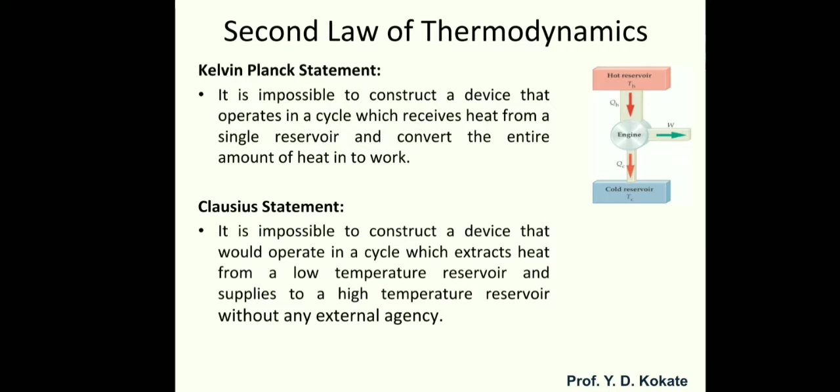Similarly, for the Clausius statement, let's understand with this diagram. It is impossible to construct a device that would operate in a cycle. Here is a hot reservoir, here is a cold reservoir. Naturally, you can imagine a very high temperature reservoir and adjacent to it a low temperature reservoir. It is natural, it is spontaneous, that heat is transferred from high temperature to low temperature. For that purpose there is no need of any kind of device.

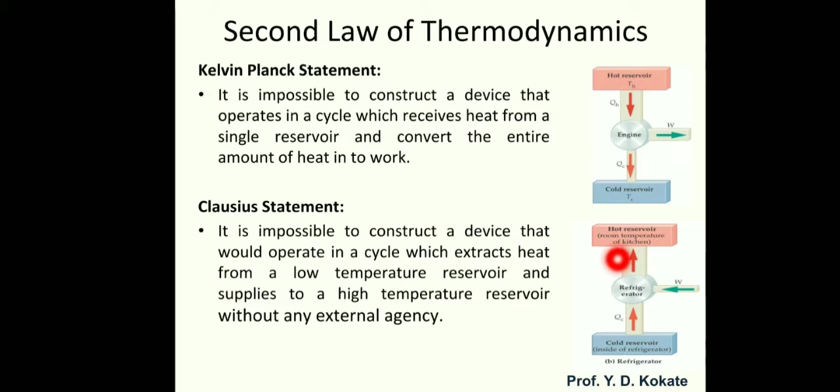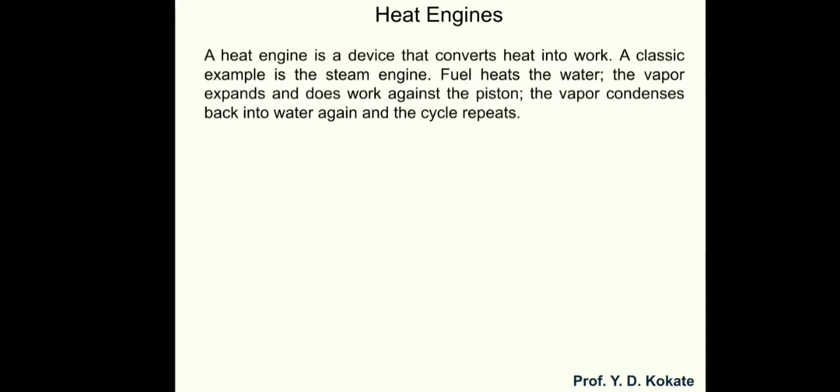We already looked at the heat engine, but in the context of the second law, once again we repeat it. What is a heat engine? An engine is a device that converts heat into work. A classical example is the steam engine, where we provide heat energy so as to convert the water into steam.

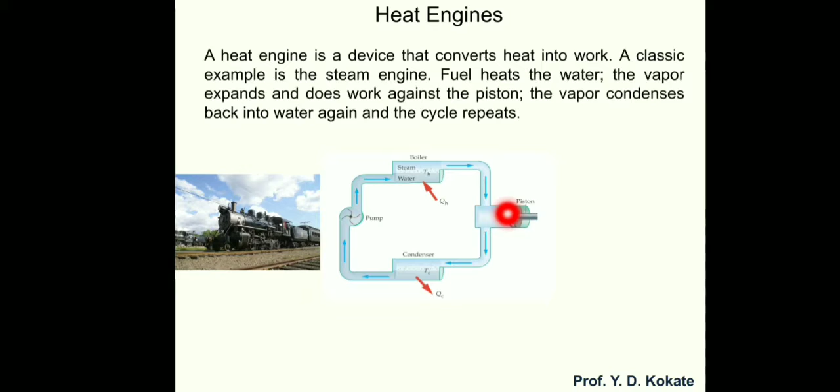So you can see over here, this is the hot reservoir, and inside this hot reservoir we supply the heat to the water so that water is getting converted into steam. This steam is coming inside this piston cylinder arrangement, and due to that the piston expands. This is nothing but the mechanical work done. So you can see over here, this hot reservoir is nothing but this boiler. This is the engine where we get the work done, and once this

steam has given its energy, that steam potential is getting down, it is getting degraded. That low potential steam comes inside the condenser, and inside the condenser the heat is getting rejected. This is getting rejected in the cold reservoir. So this is the boiler, that is the hot reservoir. This is the condenser, that is the cold reservoir.

And again this steam, once it rejects its heat, it comes into the water once again, and that water is again fed to the steam boiler, so that this cycle is getting repeated. So this cycle is nothing but the heat engine. So you can see the working of your heat engine over here.

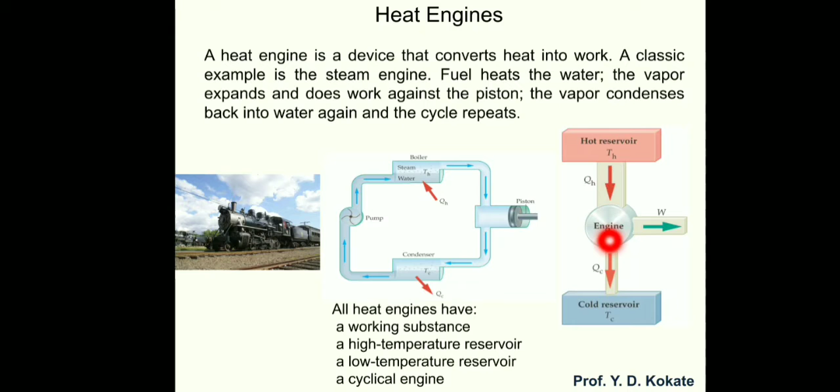So the main objective of a heat engine is to produce work done with the help of heat energy input. The efficiency of the heat engine we already calculated. The main outcome is the work done, and to get this work done we have to provide the heat energy. So QH is an input and W is the work done. So how can we calculate the work done? QH, that is 20 watt, let's say, and 15 watt is the work done produced. So 5 watt of energy is getting rejected. If I want to calculate W, I can easily calculate it, that is 20 minus 5, which is 15. So QH minus QC will be the work done.

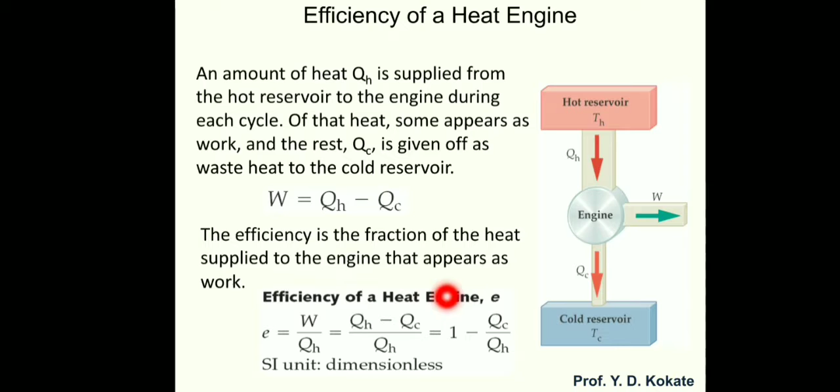If I want to calculate the efficiency, it is very simple. Work done, that is output, divided by input, that is the heat energy supplied, that is QH. W, that is work done, I can also write as QH minus QC upon QH, which is equal to 1 minus QC upon QH. So the maximum efficiency a heat engine can reach is when QC upon QH, we can also write as TC upon TH. That efficiency we also call the Carnot efficiency, that is 1 minus QC upon QH. We can replace QC upon QH with TC upon TH, so it is 1 minus TC upon TH.

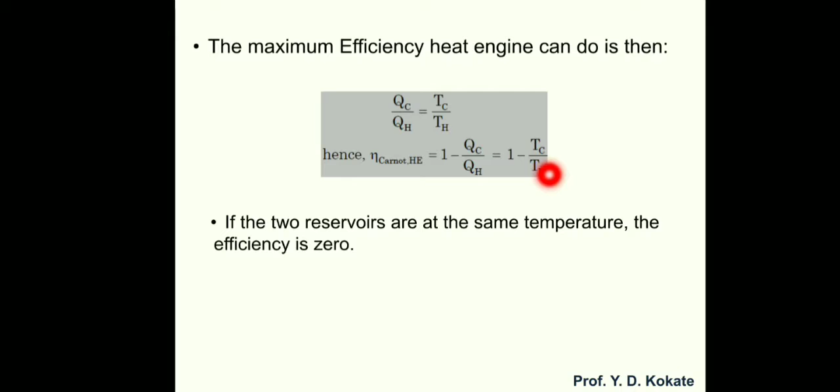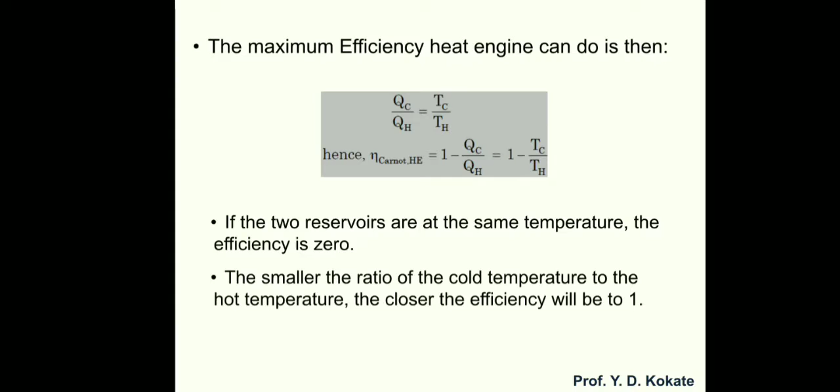So if the two reservoirs are at the same temperature, the efficiency is 0, because TC and TH will have the same temperature, so they will cancel. So 1 minus 1 will become 0. The smaller the ratio of cold temperature to hot temperature, the closer the efficiency gets to 1. That means when the temperature difference between the hot reservoir and cold reservoir is large, the efficiency is closer to 1.

Now the next device is the refrigerator. In a heat engine, we supply the heat and we get work done, and we reject some amount of energy. So here the objective is to produce the work done. Then that device is known as a heat engine.

But in case of a refrigerator, the objective is not to produce the work done. So you can see that here the arrowhead is not going outside the diagram, it is coming inside the refrigerator. That means here we have to supply the work. So that's why we call the refrigerator a power absorbing device. But in case of a heat engine, we call it power producing. Here power is getting produced, because the objective of a heat engine is to produce the power.

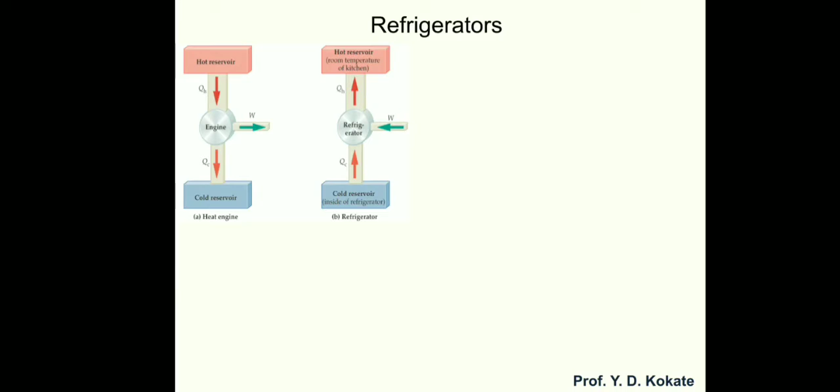But in case of a refrigerator, by using the work done, we can transfer the heat from low temperature to high temperature. So the objective in case of a refrigerator is to transfer the heat from the low temperature reservoir to the high temperature reservoir. So you can see in the refrigerator we continuously absorb the heat from inside the cabin and reject it into the outer atmosphere, which has a higher temperature than the inner side. So you can see the refrigerator over here.

So what is QH? Simple, if I am providing 3 watt of energy, I can absorb 2 watt of energy from the cold reservoir. So 3 plus 2 is the total energy that I have to reject. So QH will be QC plus W. So in case of a refrigerator, we are not finding the efficiency, we are finding the COP, called the coefficient of performance.

Why coefficient of performance? Because here the desired effect is different. Here the desired effect is not the work done. Here the desired effect is nothing but how much heat energy you absorb. So here I am interested in QC. I am not interested in QH or work done. How much heat I can absorb from the cold reservoir is important.

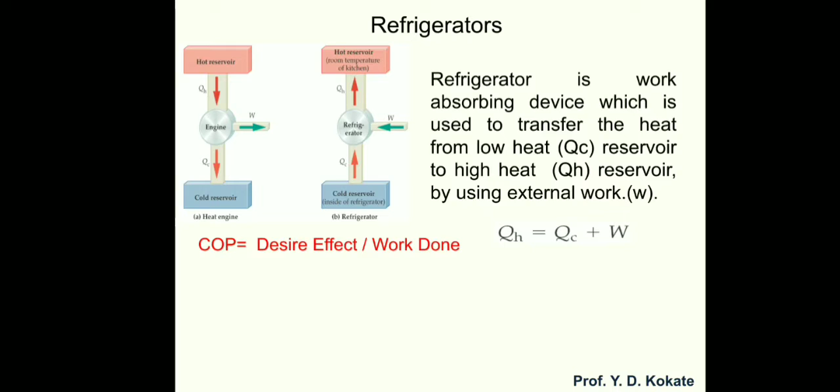So you can take an example of a refrigerator. In the refrigerator, we are interested in how much heat energy is absorbed from the cabin so that the cabin temperature decreases. We are not interested in how much energy we reject. Okay, so COP, the coefficient of performance, is equal to the desired effect upon work done. So why is the work done in the denominator?

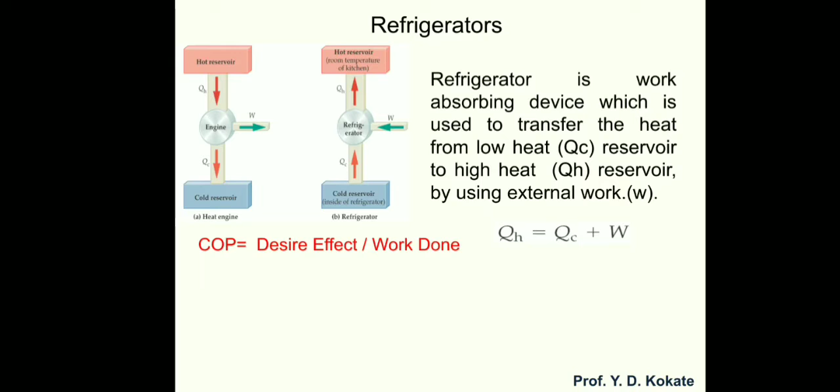Because whatever desired effect we want, for that purpose we have to provide the work done. So work done will be your input. So COP is nothing but the desired effect divided by work done. So how to calculate the

COP of a Carnot refrigerator? So what is your desired effect? What is your objective? To absorb the heat, that is QC. So QC in the numerator, and for that purpose you provide the work done, that is W cycle. So how do we write the work done? That is nothing but QH minus QC. So we write QC upon QH minus QC. And as we know that we can replace the heat by temperature, the same formula will be formed, that is TC upon TH minus TC.

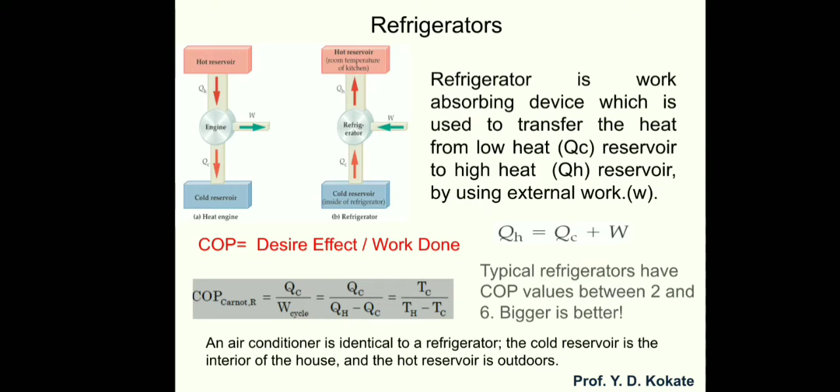A typical refrigerator has a COP value in the range of 2 to 6. We always prefer a bigger value of COP. If the value of COP is more, that means we get more performance from the refrigerator. So when we go into the market to purchase a refrigerator or air conditioner, we should always prefer a device which has a higher COP. Always remember.

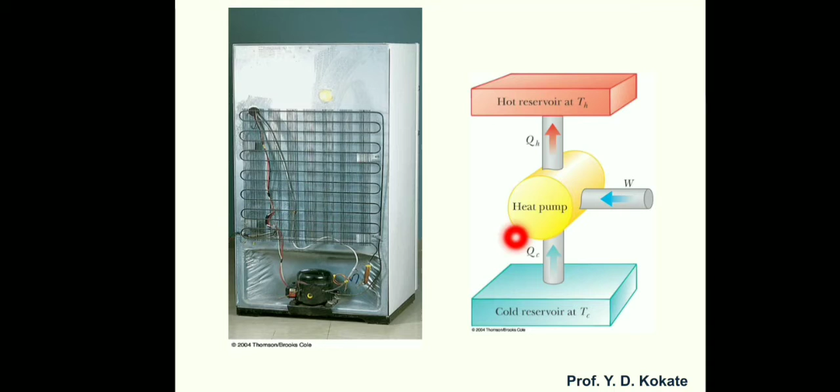Here the refrigerator compressor becomes your device which takes the heat. Here it will be called a heat pump. You can imagine that over here is nothing but the refrigerator, because the same diagram is applicable for the heat pump, just the difference of desired effect that we will discuss in the next slide. Okay, so here I want to write refrigerator instead of heat pump. So in case of refrigerator, our desired effect is QC, and that we get with the help of work done.

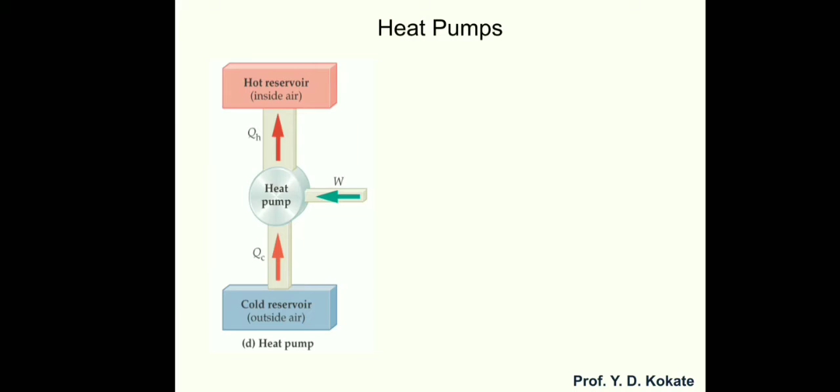So what is a heat pump? As in the previous slide we already saw the refrigerator, the same diagram you can see over here. QC amount of heat we absorb and QH amount of heat we reject to the hot reservoir with the help of W, that is W amount of work done. So what is the difference between heat pumps and refrigerators? So for heat pumps, our desired effect is different. We are interested in QH, that means how much heat is rejected.

Now the question is what sort of devices, or in which case, we use the heat pump. So if I give an example, let's say we take Shimla or Kullu Manali, where the temperature is very low. So at that time we want a warm effect inside the room. So we want to absorb the heat from the outside climate, though it is very low temperature, and reject it into the room, so that the room temperature increases. So we are interested in rejecting the heat, and that device we call a heat pump.

So a heat pump is the device which can absorb heat from a low temperature system and reject it into the high temperature reservoir. Okay, so you can see in this diagram, heat is removed, that is QC, from the cold reservoir, that is outside, and exhausted into the house, keeping the house warm, that is at QH temperature. So you can imagine that this is our room, and inside this room you want to increase the temperature. Before that, this is the outside atmosphere, let's say it is at -5, and this inside room is also at -5.

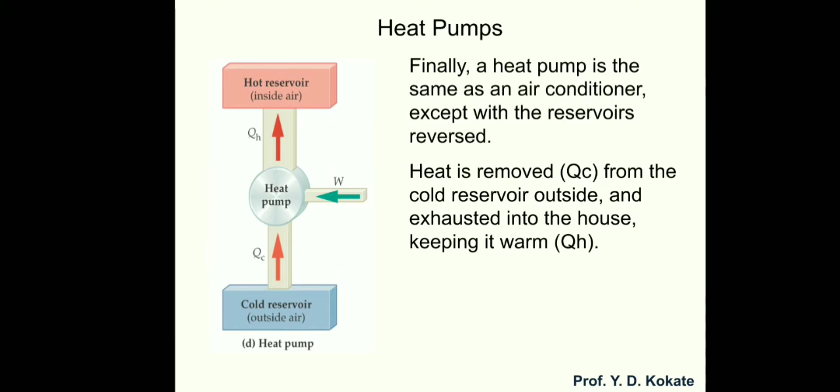But as you heat with the heat pump, the outside heat is absorbed by the heat pump and rejected inside the room, and due to that, as the heat content inside the room increases, the temperature inside the room will increase. So we get a warmer effect inside the room. So at that time our desired effect is changed. So you can see that the work done will be the same, that is QH minus QC.

If I take QH outside, it becomes QH times (1 minus QC upon QH), that is QH times (1 minus TC upon TH) in terms of temperature. Now if I want to write down the COP, in case of a refrigerator, COP is nothing but desired effect upon work done. So desired effect is the amount of heat absorbed, that is QC, divided by work done in case of a refrigerator. But in case of a heat pump, our desired effect is the amount of heat rejected, that is QH. So it becomes QH upon W.

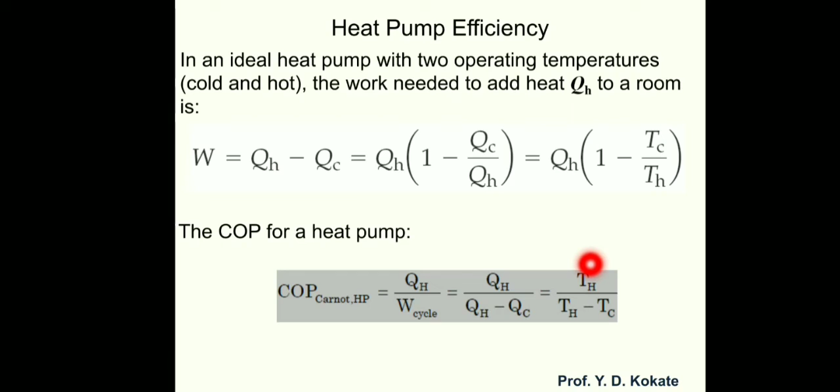How do we write W in terms of heat rejected? It becomes QH upon QH minus QC. In terms of temperature, we can write TH upon TH minus TC. So if we write down the different performance measures, we look at three types of devices. The first one is an engine, which is a power producing device. For that we calculate the efficiency, that is W upon QH, because W is the output and QH is the heat input. We can also write it like this.

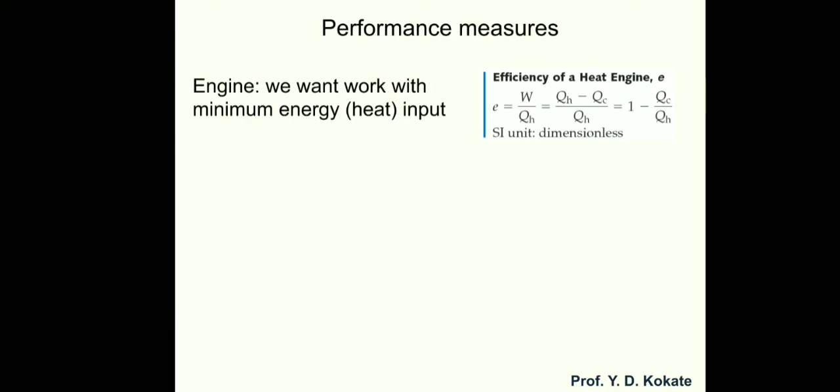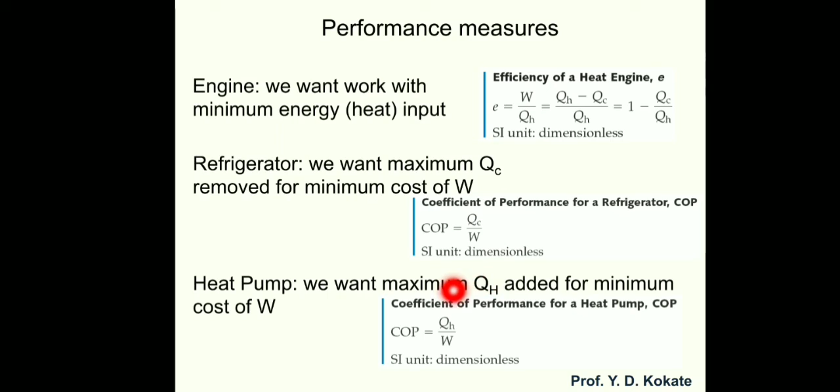Taking the next device, the refrigerator, here our objective or desired effect is the amount of heat energy absorbed. So your COP becomes QC upon W. In case of a heat pump, our aim is to reject heat, more and more, so as to increase the heat content. So the numerator becomes QH upon W. So COP is always desired effect upon work done, but the desired effect in case of a refrigerator is the amount of heat absorbed, while in case of a heat pump it is the amount of heat rejected, and that's why the formula changes.

So with the help of COPs, if I write down the COP of refrigerator and COP of heat pump, you can see that the denominators are the same, but the numerators are different. If I write it simultaneously, QL upon W net, then I get COP of heat pump equal to COP of refrigerator plus 1. This is a very important equation, and many times in competitive examinations they may ask: for the same temperature, if the COP of heat pump is 4, what is the COP of refrigerator? It is always less by 1, that is 3.

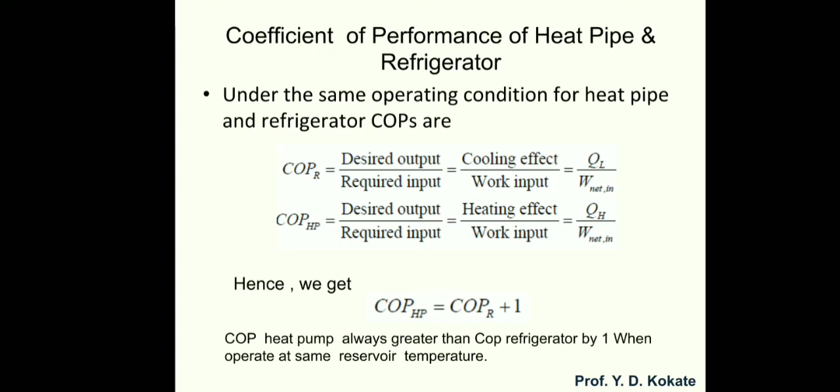They may ask like this: the COP of refrigerator is 4, and at the same temperature, if we convert that refrigerator into a heat pump, what COP do we get from the heat pump? Simple answer: if the COP of refrigerator is 4, the COP of heat pump is greater by 1, so it is 4 plus 1, that is 5. Like that you can calculate. So COP of heat pump is always greater than COP of refrigerator by 1 when operating at the same reservoir temperatures. This is very important. Okay, so this is one numerical treatment.

In this numerical, an industrial heat pump operates between the temperatures 27 and minus 13 degrees Celsius. So 27 is the higher temperature, so we add 273 plus 27, and it becomes 300 Kelvin. And the lower temperature is 13, so 273 minus 13 becomes 260 Kelvin. Here is the minus sign. The rates of heat addition and heat rejection are 750 and 1000 watt respectively. The COP of the heat pump is?

So very simple. We know the COP of heat pump is the amount of heat rejected divided by the amount of heat rejected minus the amount of heat absorbed. So what is the amount of heat rejected? That is 1000 watt, divided by 1000 minus 750, that is 4. So option C is correct. This is a question from the GATE examination, and it was asked for 1 mark. So a very simple formula is used over here. Like this you have to solve some numericals.

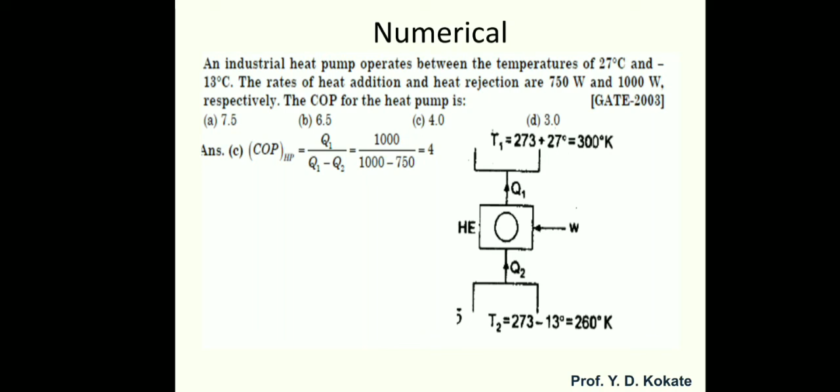Okay, so here we stop, and today we learned about the first law and second law of thermodynamics. Okay, thank you.